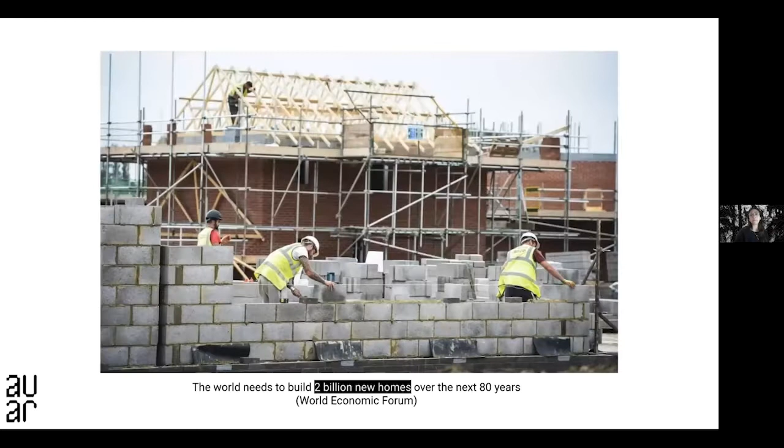And this is really a key part of the strategy for how we think about automation around these collective decision-making structures. So we're really interested in understanding how automation can provide a better opportunity for designing better production practices for architecture that can be more accountable and more aligned to the value systems of the communities that we're working in. So in our work, we like to think about the ways that we can dismantle power structures that have contributed to the status quo.

We have existing methods of production that are really not geared to addressing major global issues, and this is very familiar territory for architects. But we have to address these issues. So for example, we need 2 billion new homes over the next 80 years. And in the UK, where I'm based, we have a huge scarcity, not just of the companies that are able to deliver on these kinds of housing, but a scarcity of land due to the huge amounts of financialization.

Over 50% of England is owned by less than 1% of the population, and we only have 10 major house builders in the UK. And this has really created a scenario where in the UK alone, 1 in 7 people are affected by the housing crisis. These are numbers that represent different kinds of housing precarity, homelessness, overcrowding, rent arrears. 1 in 7 is a significant number.

And we also have existing methods of production that are really not geared towards the climate emergency. So, one of my favorite statistics is if the cement industry were a country, it would be the 3rd largest emitter in the world. And we really need to think carefully about how these issues are wrapped up together. And we're looking here at construction, but we're also looking at policy making. And planning is also not really well suited to deliver on these needs.

So we see oftentimes in the UK really top-down consultation practice, and this treats communities really as though they're afterthoughts, and has produced a really huge lack of trust in planning processes and a culture of NIMBYism. And this really widens the divide between those house builders, those policymakers, and those communities that desperately need homes. And then if we look more closely at the discipline, we can see architecture as a profession has really become much more fragile.

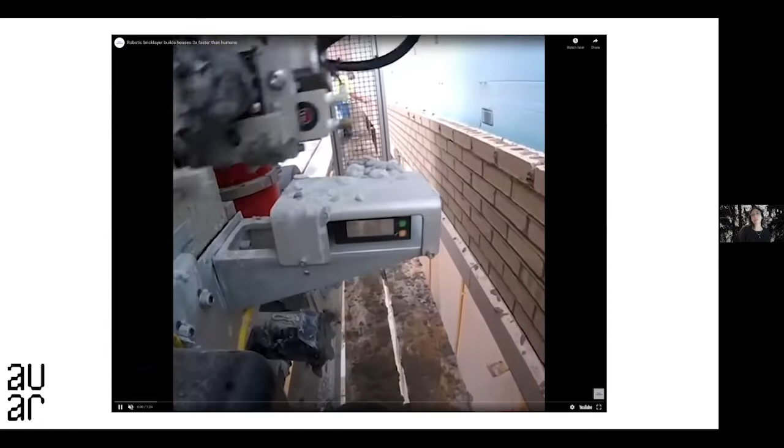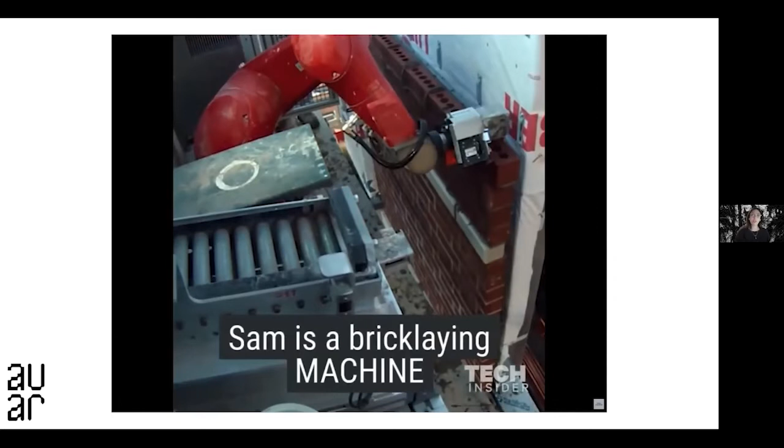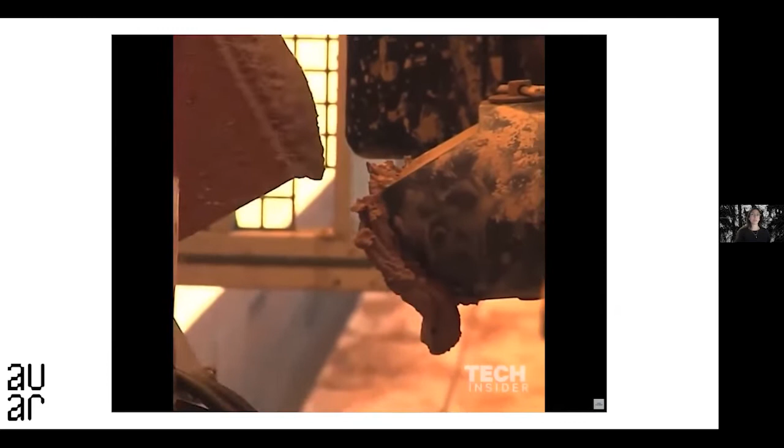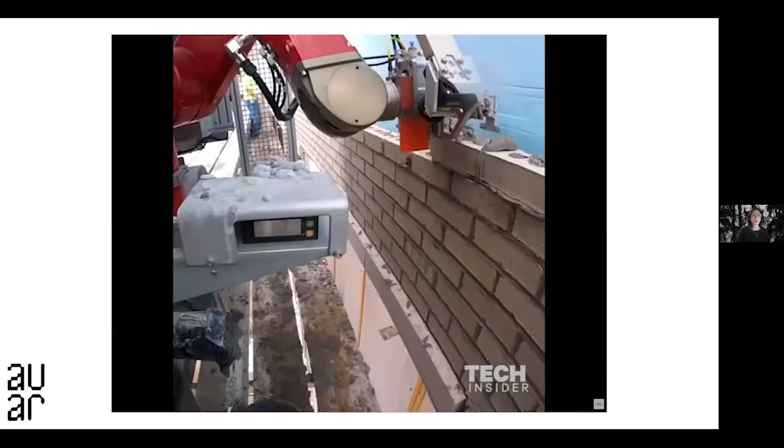And then if we switch and look at technology, I'm really interested in automation. We're looking at dominant narratives around automation. The dominant narrative in automation and construction has really been around the loss of jobs that use manual labor, and the digital fabrication technologies being developed to replace these jobs tend to focus purely on the productivity gained by implementing them. For example, here, a bricklaying robot, but we also have tile laying robots, et cetera. Other benefits become peripheral to issues of productivity and efficiency.

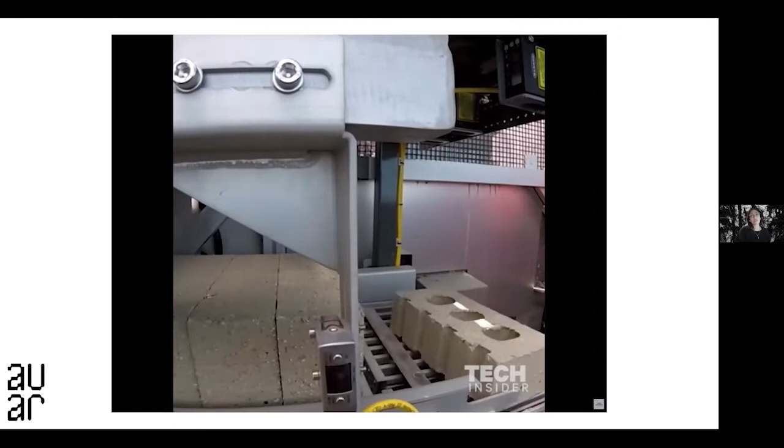When we look at them more closely, we see that these technologies are products really only available for those with extreme wealth. This one in particular, SAM, the bricklaying robot, also called Hadrian in the UK, cost $500,000 when it was first launched 6 years ago. Right now it costs £16,000 a month to rent in the UK.

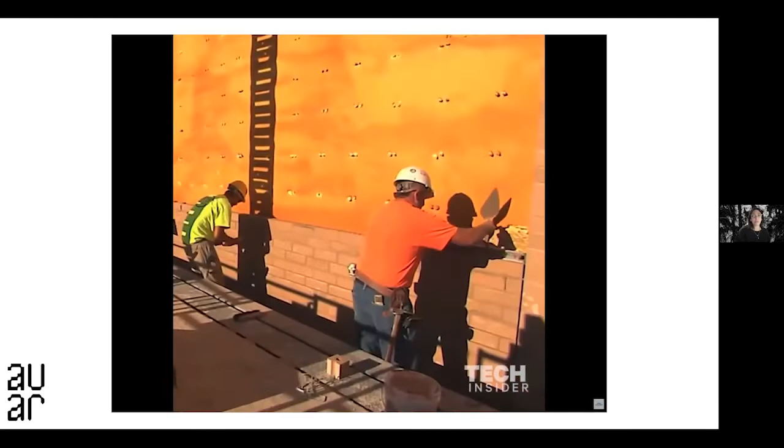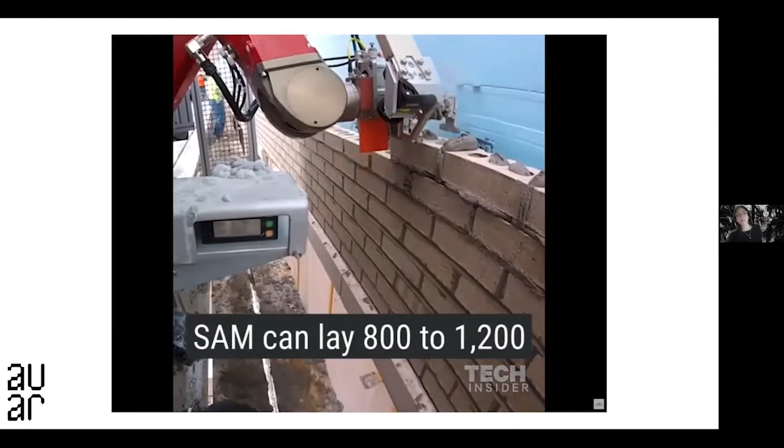So while these robots are extremely limited, and there might be innovations in terms of how we think about what a job might be in construction, they're also very much solving only narrow, localized issues, and they're really inaccessible. Generally speaking, they're actually now on black markets and on eBay as well, which is kind of amusing.

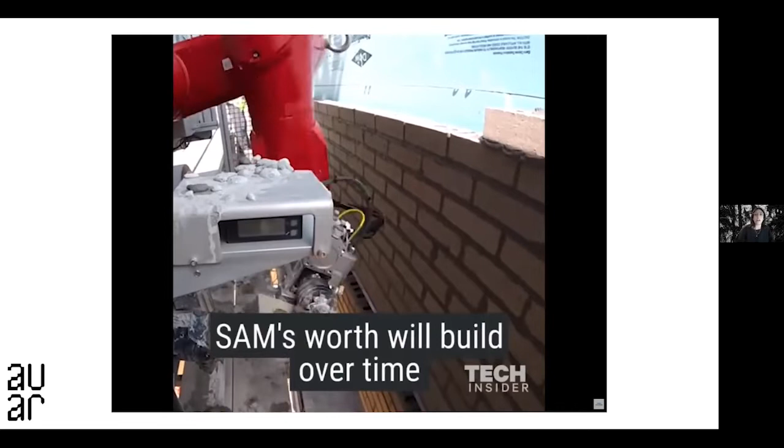If we scale away from the scale of the technology and think about the scale of production frameworks, we're also looking at automation at the scale of the factory. What we've seen is that automation in housing at the scale of the factory has really looked at automobile manufacturing as an example. Modular housing factories are taking these massive factories and putting housing production into a centralized system, offsite factories disconnected from the context in which they're deployed.

What that results in is that factory-made housing is seen as displacing local jobs. This creates resistance and skepticism among local communities, and also very limited localized capacity for housing using automation, because of this lack of trust built into this centralized framework. And the failure of this model is currently very acute.

A very big story earlier this year was that the construction unicorn Katerra collapsed and filed for bankruptcy. Katerra is a great example of how the automation gap in construction, one of the least automated industries in the world, is not a problem that can be solved by a single technology or a vertically integrated production chain. It's not just a problem of efficiency or productivity. It's a problem of design. And design touches on frameworks for labor, the interdependence of things, the resilience of systems, policymaking, decision-making, but also care. This is where we're landing with our work.

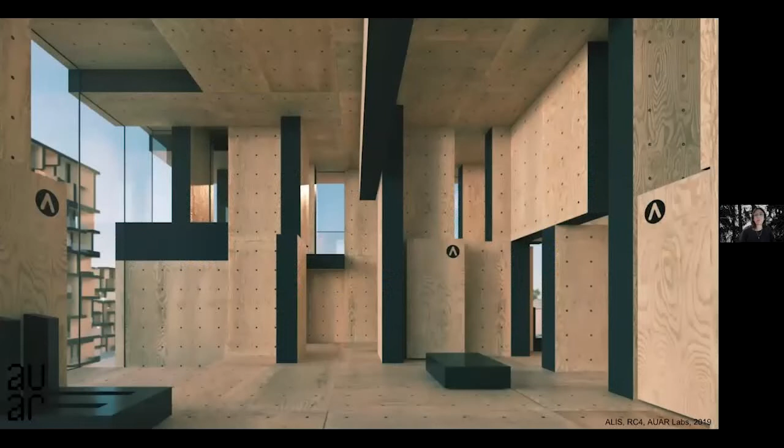What we see is that all of those practices are historically constructed. And as much as they are constructed, they are designed, and as much as they are designed and constructed, they can be redesigned and reconstructed. So automation gives us an opportunity to not play innocent anymore. Automation isn't an innocent thing. It immediately forces positions and asks questions about what a fully automated society might mean.

It asks questions like: who owns the robots? What kind of ownership models are in place? Which jobs remain? What kind of housing do we want to live in? How do we produce that? There are deep cultural issues within building production that highlight current practices that can't adapt to automation. When we use the term automation, architects are suddenly forced to think about those big questions: labor, platforms, jobs, control, ownership. Therefore, automation is really a design project.

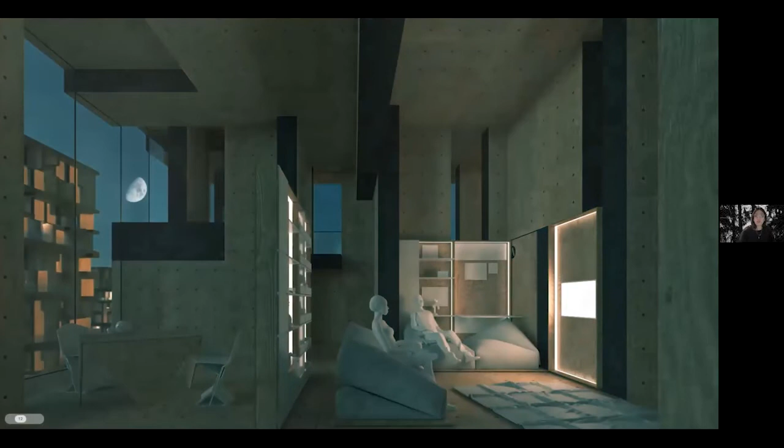So what then is architecture designed for automation, or an architectural framework for production designed for automation? In our work, we've proposed that we have to radically redesign how architectural parts are designed in relationship to automation, both as a process in terms of the technologies we use, and as a framework in terms of the context in which we're working. For example, how accessible is automation for the people we work with and serve? This resulted in a proposition that significant reduction of architectural parts is possible.

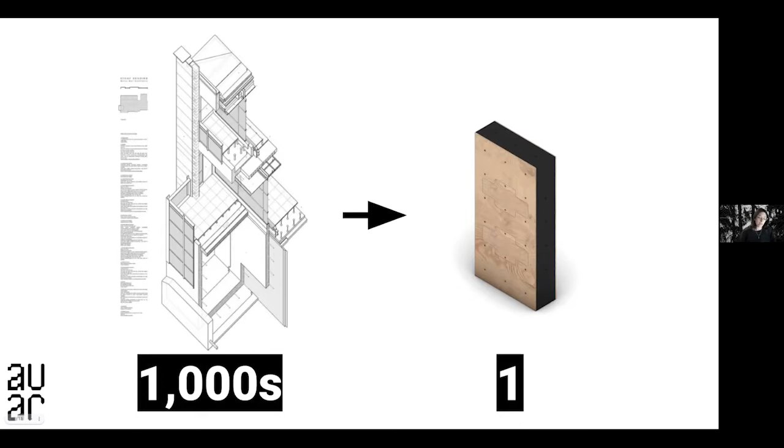And this enables a rethink around the dichotomy that exists between design, automation, and building cultures. Now, this is known as the discrete, where architectural parts are not constrained to types like columns or floor slabs or beams or staircases. And instead, we think of architectural parts as similar to zeros and ones in code. And the same building part can then be used to construct every part of a building's core structure.

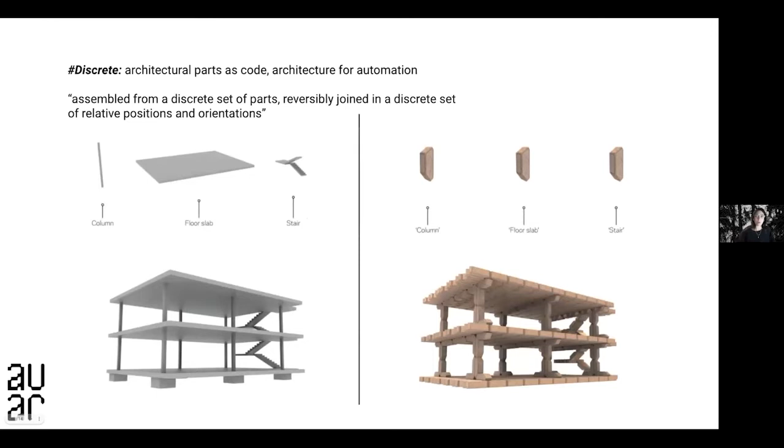Now, part of the discrete approach in our work is also embedding enough intelligence and simplicity into architectural parts to enable people to engage with and interact with them in very intuitive ways. So part of that design of the discrete block itself is to design ways of working with that can empower communities to participate in designing and making. And this subsequently allows and enables them to take back that power around what is in their built environment and create the homes and spaces that they need.

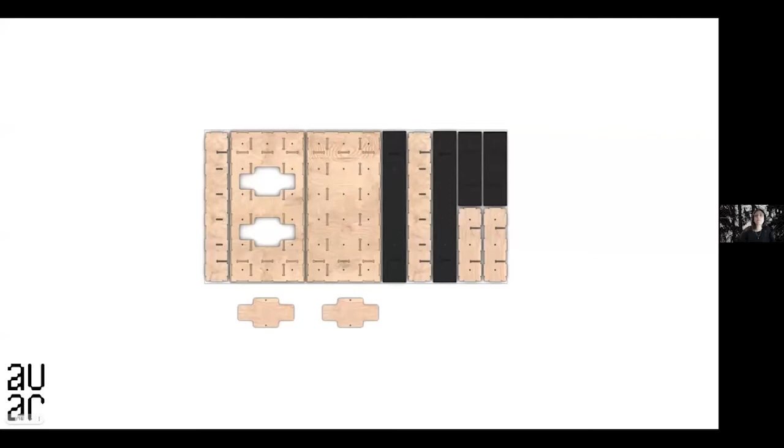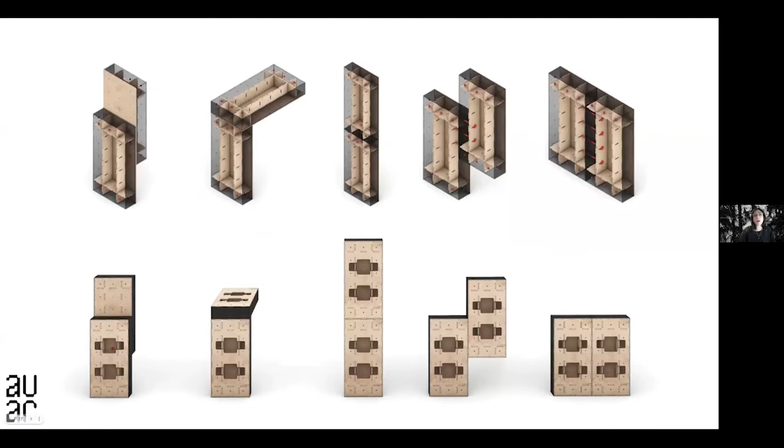So we also have values in the block in terms of the intersection between automation and waste optimization. This sits in contrast to the kind of mass customization strategy using other forms of automation. Block type A, which was the first version of our building block in our housing system, one sheet of timber equaled one building block that's repeatedly cut and can be manufactured almost anywhere. Block type A is a prefabricated tension system, or post-tension system, and it incorporates reversible connections so we can reconfigure and adapt the system or assembly over time.

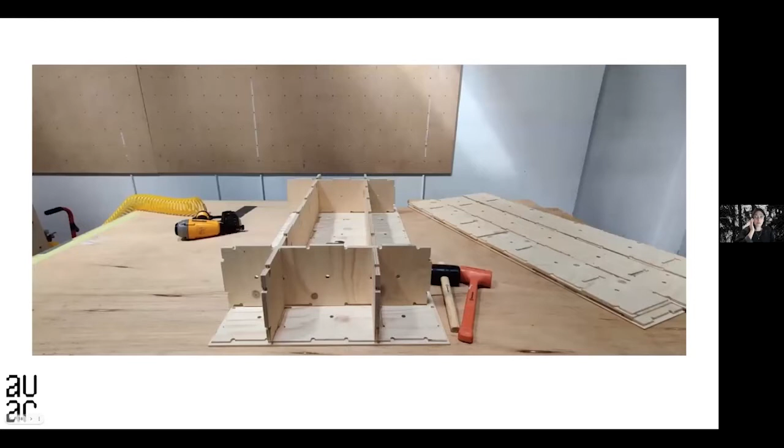Now, this is based on principles from mechanical engineering called digital materials that have behind them principles of part variation and part reversibility. Now, these versions of the blocks also use very simple, off-the-shelf tools. It requires very little expertise and training to both prefab and to assemble. In the spinout, we're currently working on fully automating a new version of the block for both prefabrication and building assembly that also decreases the manual prefab time, making it super optimized for people to work with it with their hands still.

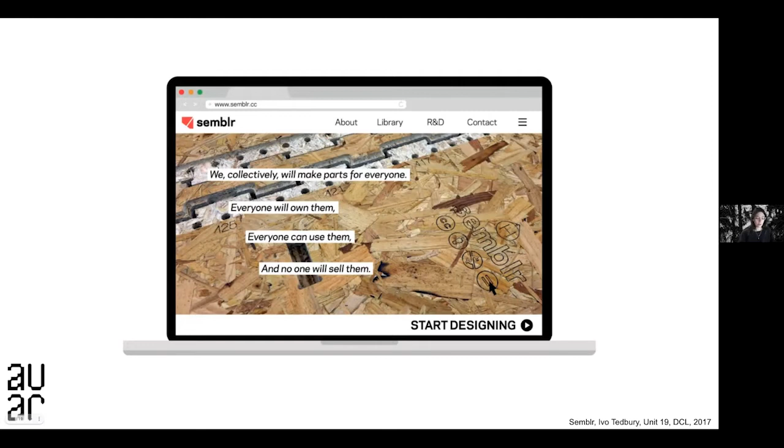And a key part of this for us is trying to design frameworks for automation that distribute expertise and keep the value that's co-created by the communities within those communities that are producing. And in our case, this is prototypes for production as well as prototypes for homes, or now we're heading into producing homes themselves. So one of the ways that we've done this in the lab is by working across the country to develop partnerships and projects with organizations that are actively working at the local or community scale. And our collaborations build networks across the UK, currently along the Southwest Corridor and the Midlands.

And the organizations that we're working with are primarily citizen-led or community-led or arts-led organizations that put at the core of the work an ethics of care around how we do the work, which allows us to recognize that both enabling participation and participating in built environment production is extremely difficult, so that we really must embed principles of care and support at the very core of the projects that we do with the communities we're working with. So one of the ways that we're thinking about this is working towards a cooperative model where the communities that we work with also become stakeholders in the platform that's created themselves.

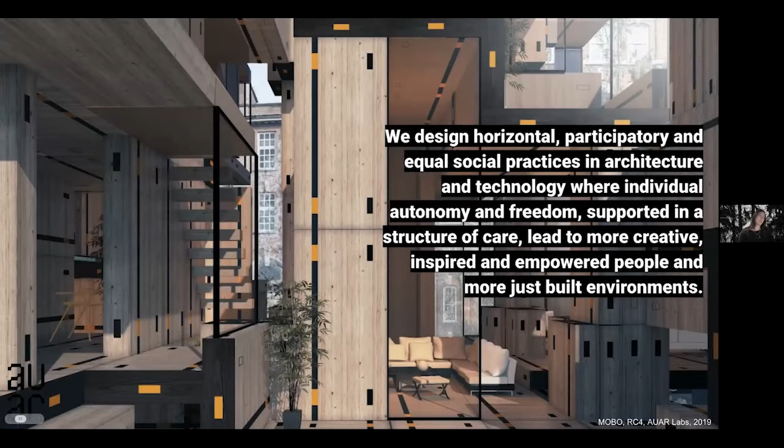So in the lab and in the spinout, we've designed a mission lock, or a set of principles that guides our future plans. And it really allows us to protect that social purpose as we scale the work, not just in terms of strategic partnerships, but also within those communities or in conversations around any investment that we might take on board in the company in particular. So this is the opening line to the mission lock. We design horizontal, participatory, and equal social practices in architecture and technology, where individual autonomy and freedom, supported in a structure of care, leads to more creative, inspired, and empowered people and more just built environments.

Now, what we have found is that this makes the process of design production much more accessible for people typically othered by professional practice. And this really allows us to widen the boundaries of who can participate in the work. And a really core question that we ask ourselves is, what is the capacity of engaged scholarship, or what's called a values-centered approach, to enhancing citizen-led design using automation and new housing and construction systems?

And engaged scholarship is an interesting thing for us because we're academics. They're now in developing a new kind of practice. And engaged scholarship is typically about how you take that practice from outside of the university setting. So engaged scholarship technically is how you equalize power relations, democratic practices, situation-based action, mutual learning, tools and techniques, and alternative visions about technology.

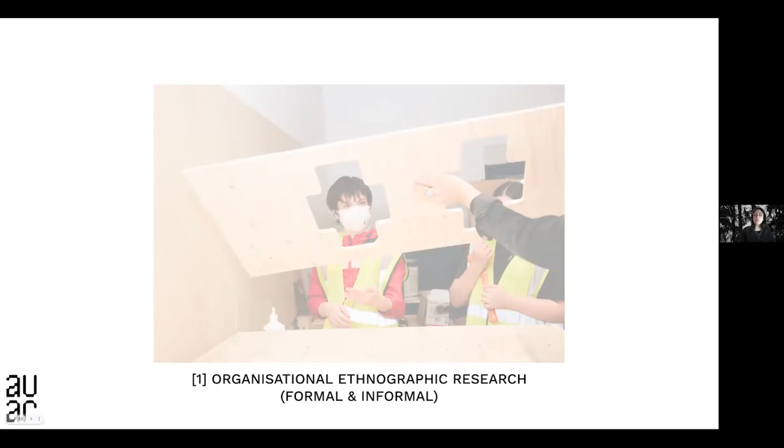So we have 4 principles that we use primarily, and I'll go through those very quickly. They're all embedded in an ethics of care. The first one is how we use organizational ethnographic research. This is a mode of inquiry which focuses not just on really established and formalized cultures, but also on informal subcultures. And these act as the kind of settings within which social relations take place between actors moving towards a particular goal. So we're very much interested in how we capture that.

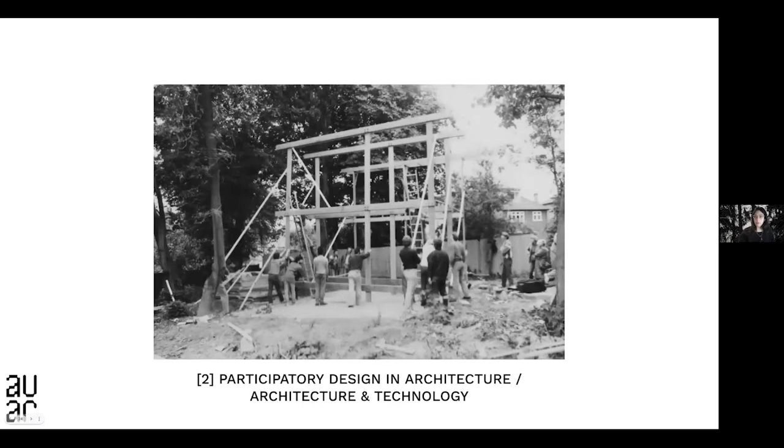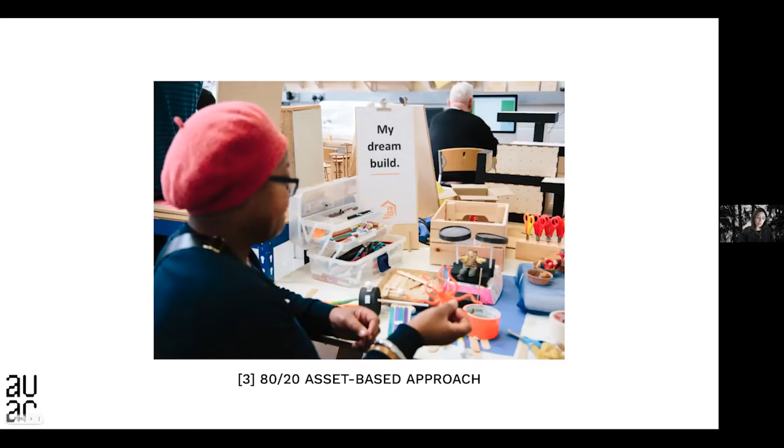A second principle is that we propose embedding work on automation and architecture within the history of participatory design in architecture. This is an example of Walter Segal, for example. And then the third is that we devise approaches and methodologies that take an asset-based approach. So the core of an asset-based approach is not asking the question when you come into a new community, what needs to be fixed? Instead, it asks what's already here, what's missing, what needs to be brought to the surface. So we're not trying to come in to be solution making, we're here to ask questions and have that become emergent. So that helps us begin to think about what is our ethics of care.

So one of the core things here is that we need to build trust in a system that has generally broken down. So at the very core, we need to begin to think about how we decolonize automation and put central in our work and activism an ethics of care and authenticity as the backbone to our understandings of space and place. And through interlinking these 4 aspects together, the consequences of these relationships more broadly on how we imagine futures can really begin to be understood and transformed.

Now, there's kind of 3 consequences of this. So a vision of automation really as a design project is one that doesn't monopolize or centralize automation, but demonstrates the capacity for automation to accelerate the production of abundance and amplify interdependencies instead of creating more marginalization. So that vision must do the following 3 things. It must confront the value systems and hierarchies embedded in our existing social and spatial practices by rethinking architectural parts. We must redefine automation's capacity to understand increasing access in architectural production for the benefit of more people and many stakeholders, and also consider automation as being transcalar and distributed rather than centralized.

So recently we've worked with 2 communities in kind of similar ways. One is Knowle West in Bristol, which is a community in South Bristol, and one is around the Olympic Park in East London. And in both places, we're working with local residents as well as local policymakers, primarily because these are 2 groups that are hugely disadvantaged by the status quo, in that there's really a huge lack of trust from communities on the one hand, which is completely valid, and on the other hand, an inability to really take risk from those local councils.

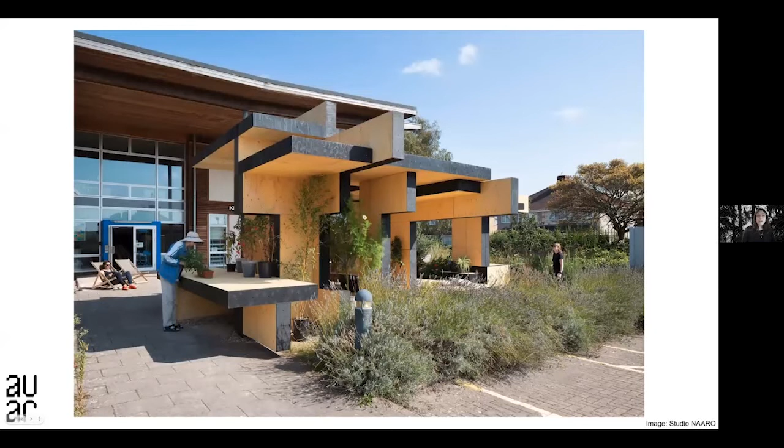So for example, in one of our projects, Block West, we set up a factory, not in your typical factory setting. This was in an arts organization's studio that's typically used for youth group activities. In Hackney, we set up a workshop in a local college, which is a bricklaying workshop. And we used these settings as a place to explore how we might begin to think about what those communities need.

So this is Block West. It's a community housing prototype that has had a second life. Now it doesn't look like this anymore. In Knowle West in Bristol, this project was the result of a 6-month-long workshop series, and was built out of 145 Block Type A's, assembled together from sheet to prototype in less than 2 weeks. And throughout the course of the project, over those 6 months, this was March to September 2020, it provided 25 part-time jobs in the local community.

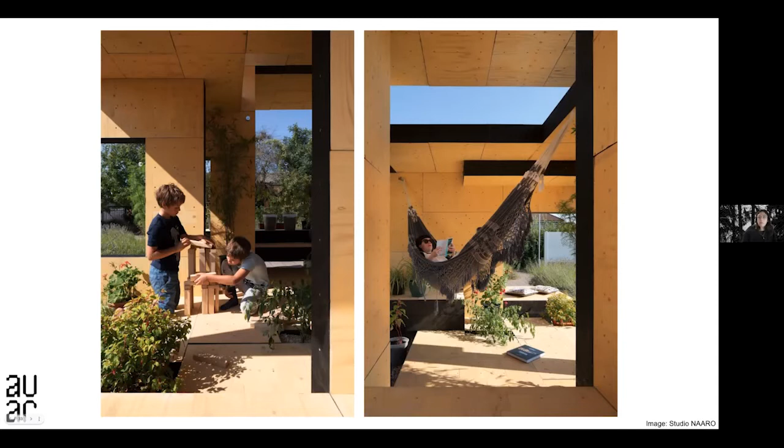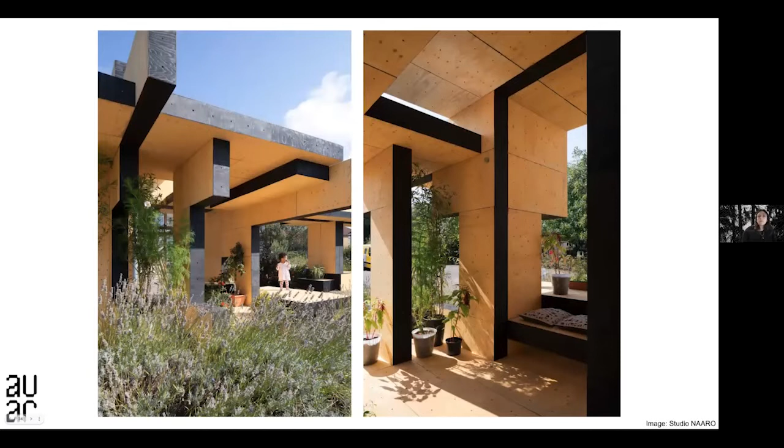And it really became this prototype place where we experimented with all the new ways of living and working that we needed to address within that community. It also acted as a training program for more permanent roles that were created by our partners. And in Block West, our group of 25 was 50% women, and we had people aged 12 to 76 involved. And it's really important in a place like Knowle West to think about how this began to be a seed through which we could begin to form new ways of working together.

Knowle West has no center, it has no community hub. There's been historically very little investment, and it's often a place where money washes through rather than adding sustainable value or social infrastructure. And so we are continuing to work in that area to think about how we can help provide the social infrastructure that can really begin to be the community hub that's missing from the area.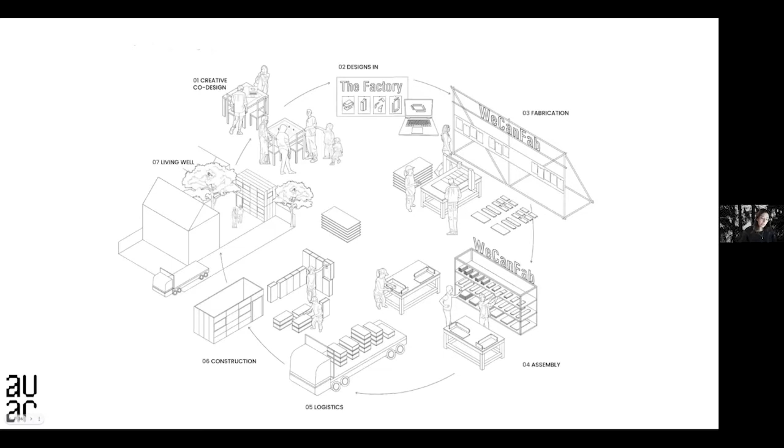As part of the wider project, we're working on a sliver of the project called WeCanFab. This is a citizen-led housing factory, originally funded by Innovate UK. And we're developing a digital platform here for multiple different kinds of modular building systems to be produced alongside ours. And collectively, we imagine that this platform can be deployed in a kind of cooperative model for practice, where multiple practices are coming together to help and enable a community to build the kinds of spaces that they need.

In House Block, in Hackney, in that bricklaying workshop, we worked with New City College. This is a construction program, 16 to 18-year-olds. And over the time that we were there, we brought required work experience that those students were expected to get outside of their school into their school. This made it much easier for them to access.

We also worked with dance studios, the Building Centre, Waltham Forest Creative and the Future Creatives program, which was another work experience program where we were enabling young people interested in careers in design and architecture to curate their own public programs in response to some of the questions that the work we were doing with them proposed. And the project really served as a kind of mechanism for the council to begin to understand how it can use the smaller bits of land that it owns.

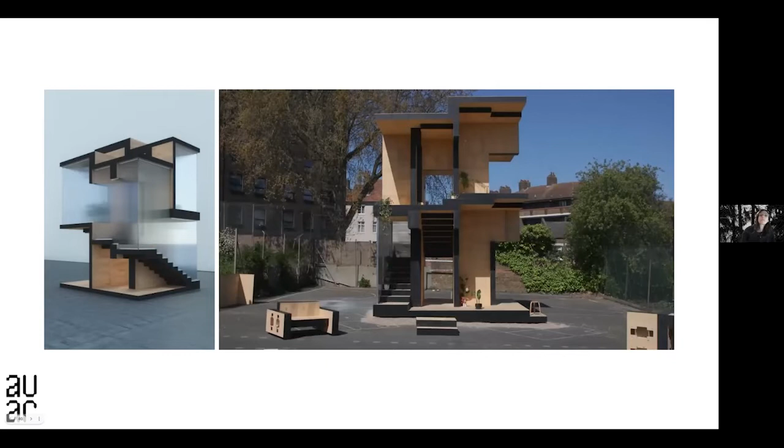These are spaces called nothing spaces, which is highly offensive. They call them nothing spaces. But we were trying to think about how we can begin to use these spaces that developers don't want to develop, and the council can't take the risks. How can we engage the local communities in network building for rethinking how we produce homes in these kinds of sites?

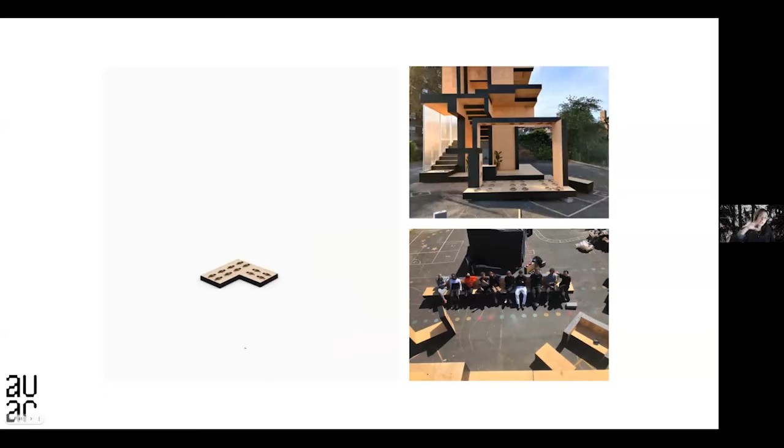And there was a core structure to House Block. It was adapted over time to a series of public program takeovers. We provided spaces for sound installations, dance pieces, meals, parties, roundtables, filming, performances, talks, and we provided paid opportunities for local residents to get involved in the project, both to enable the participation of as diverse a group as possible, but also to provide 60 part-time weekend jobs in the community, some of which transferred to the next site for the blocks from House Block, which I'm not going to talk about now, but I'm happy to talk about it later.

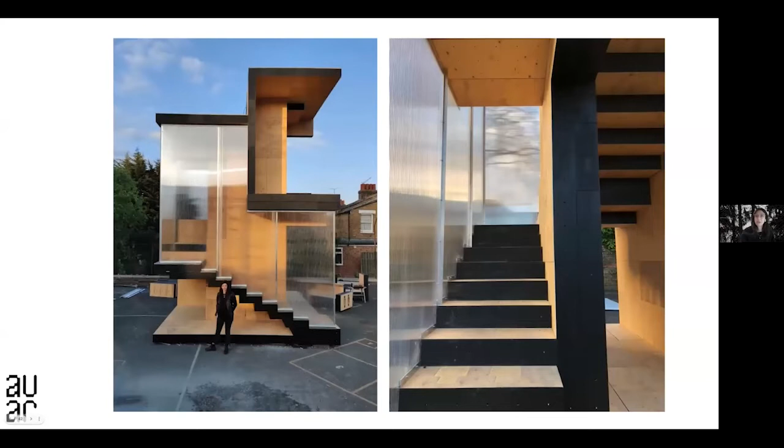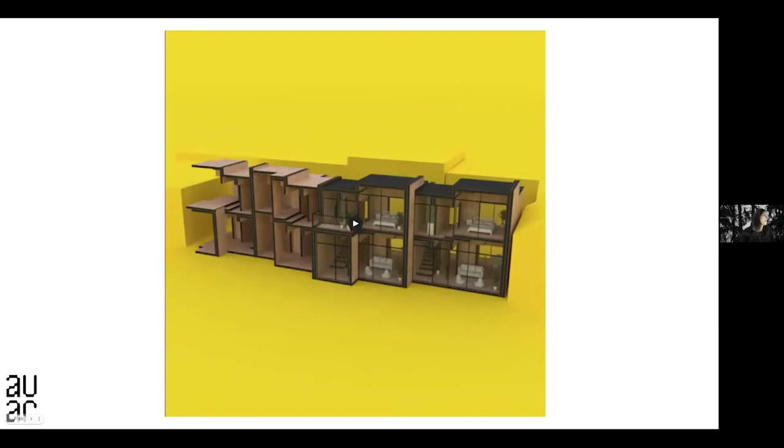This was a 1.5-year long journey, delayed by COVID, but it brought together a group of people from inside and outside of the university. I think it is a really good example for us of one version of what engaged scholarship could possibly look like. And the prototype, I think, really demonstrates what could be achieved if we were to think about participatory approaches to housing, where local communities make use of those digital modes of production, particularly in the spaces that local councils have available that are too risky for them to do anything meaningful with.

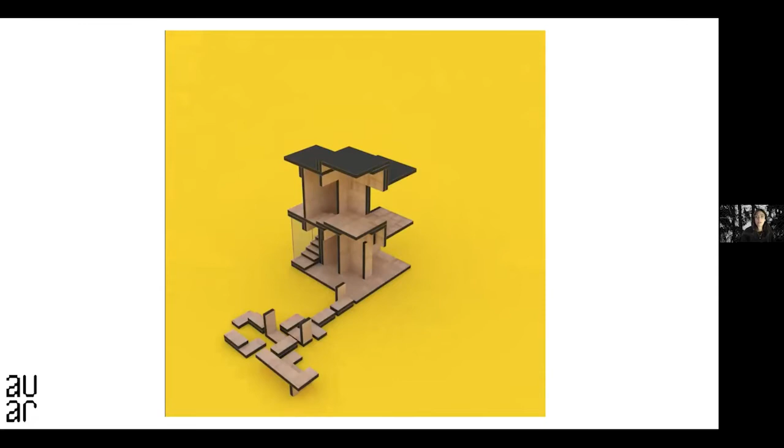And we were able to show that meanwhile use of this kind of project brings on board communities that are otherwise perceived to be very disparate or very disconnected from these kinds of issues. It was a real community and network builder within the community itself.

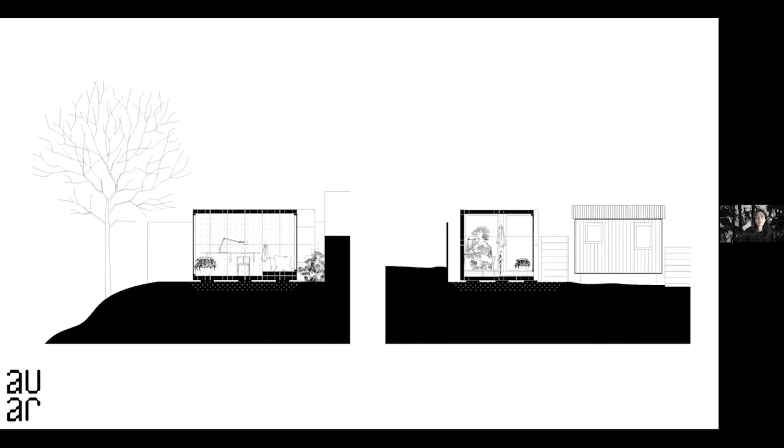We have now also in the company, we're building upon this work with a series of block studios. It's primarily the work of the spinout, but the frameworks for labor and production that we're developing are related explicitly to the work of the lab. It builds upon the community partnerships that we have in place. In the block studios, we've been working directly with three women who all bring similar stories of structural disadvantage, but also aspiration for change, not just in their own lives, but in their communities as well.

The objectives of this project are really to begin to think about how do we seed public participation within housing production? How do we reveal mutually beneficial knowledge exchange on local housing needs and opportunities around automation? How do we nurture the skills of people in those communities in how they document their lives and how they tell their stories? How do we capture those local narratives from our participants and residents to complement and strengthen how we develop impact strategy and policy making?

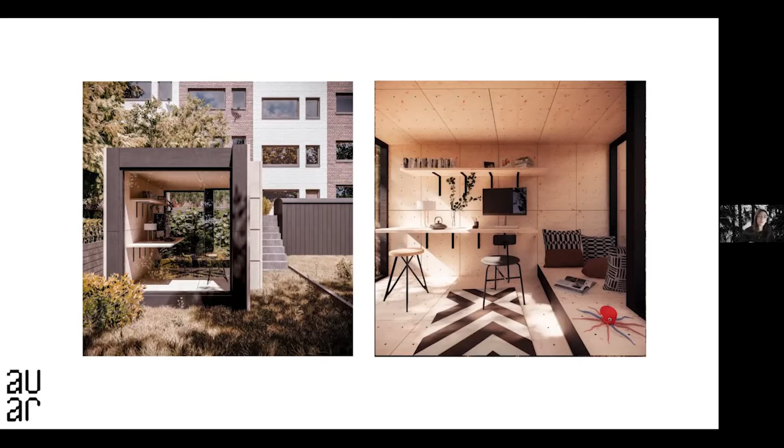And then also, how do we activate small, micro and backyard sites, let's say Bristol's version of micro or nothing sites, with workspaces and studios for the local community that are co-designed and co-produced by the local community. The block studios are small enough to fit block type A in the back of a Luton van, which makes it super easy to transport from their production places nearby to their sites.

It allows us to begin to think more carefully about what a factory might look like when it's embedded in a community. And it's really guided by this overarching ambition to understand, through the lived experience of the women that we're working with, what expanded ideas of home could look like and what it could offer to those smaller sites, but also how it could begin to scale up to larger sites.

Now, ultimately, what we think our approach begins to do is unravel this notion that is often perpetuated within the discipline and professional practice about who is the expert, who is the professional. And this enables us to think about how we create a more horizontal framework for wider participation in design automation, and how the value we create stays within the community itself.

It also enables us to think about how we can invest in the social and technological infrastructure in communities to ensure that they have the skills and knowledge resources that they need to adapt and recognize and celebrate their interdependence, not just within their community, but also within their built environment, not just in terms of the material resilience that they might grow, but also the community resilience that they might grow as well. And I'll leave it there.